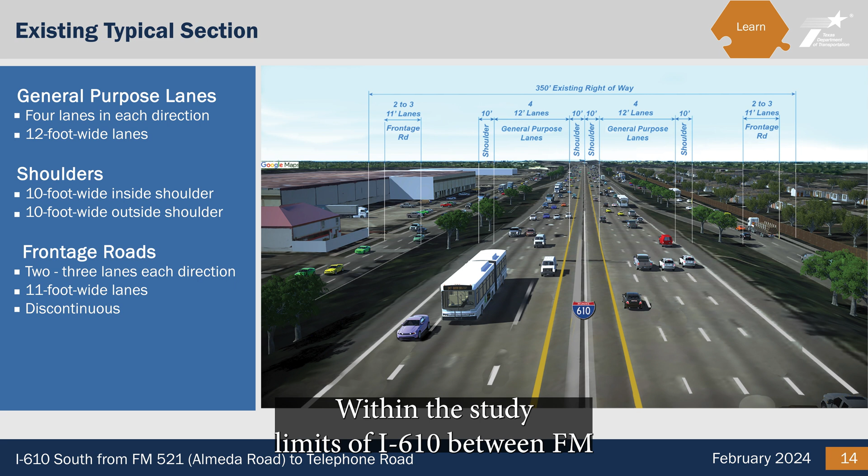Within the study limits of I-610 between FM 521 Almeda Road and Telephone Road, the current roadway has 4 12-foot general purpose lanes in each direction with 10-foot wide shoulders.

The frontage roads have 2 to 3 11-foot wide lanes and are discontinuous in some areas. The existing right-of-way is typically 350 feet.

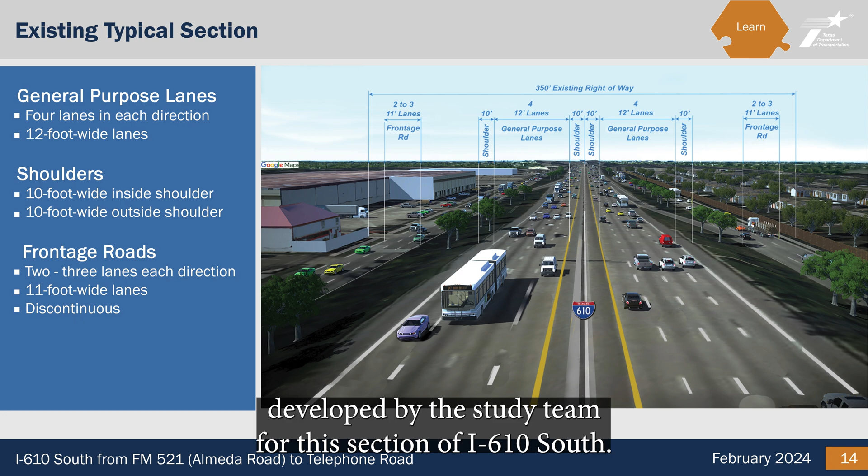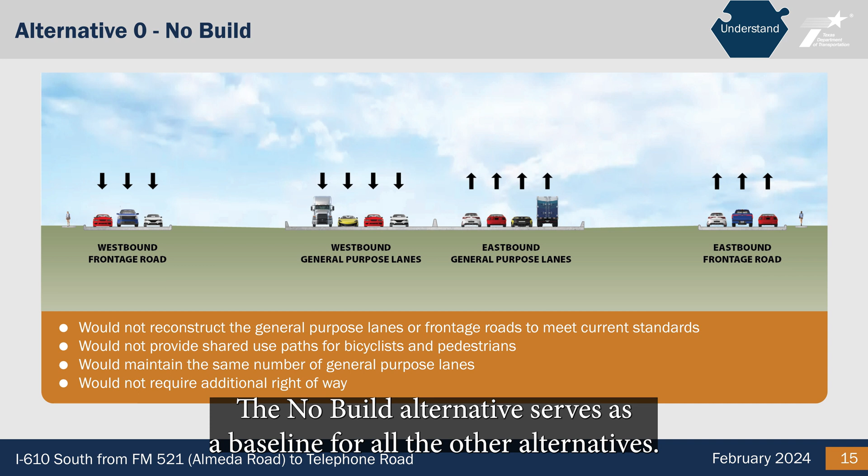The next slides show the conceptual alternatives developed by the study team for this section of I-610 South. The first conceptual alternative is Alternative 0, referred to as the no-build alternative, which means do nothing. The no-build alternative serves as a baseline for all the other alternatives.

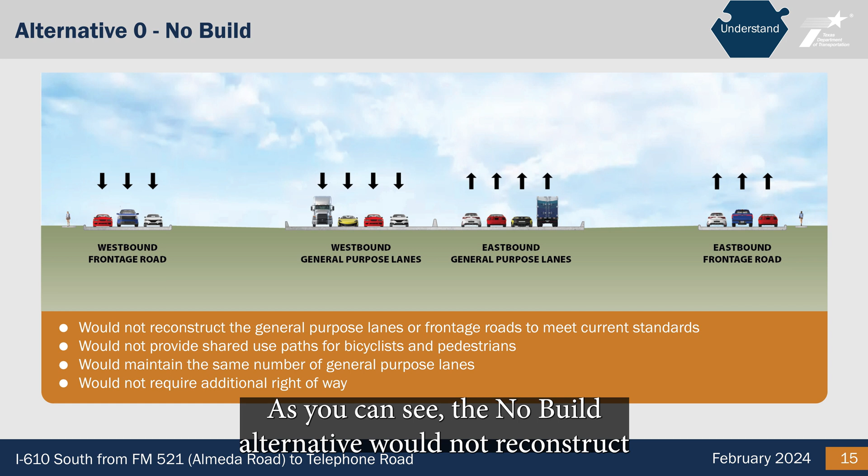This portion of I-610 South would not change and would be the same as it is today. As you can see, the no-build alternative would not reconstruct the general purpose lanes or frontage roads to meet current standards.

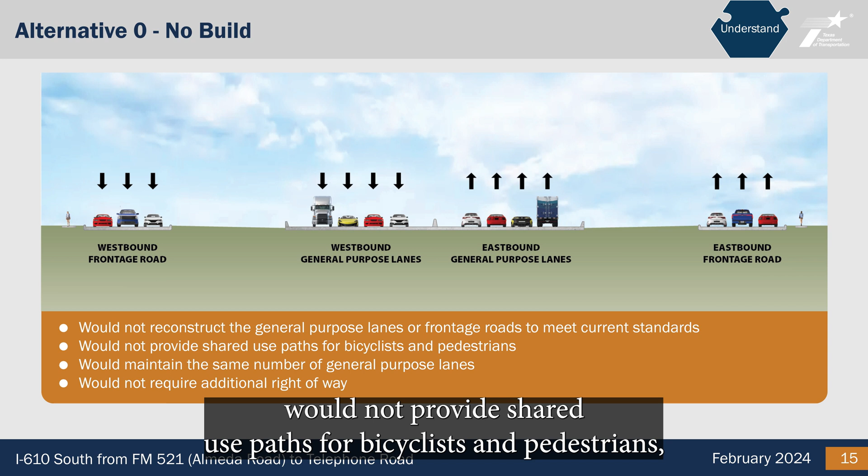It would not provide shared use paths for bicyclists and pedestrians, would maintain the same number of general purpose lanes, 4 in each direction, and would not require additional right-of-way.

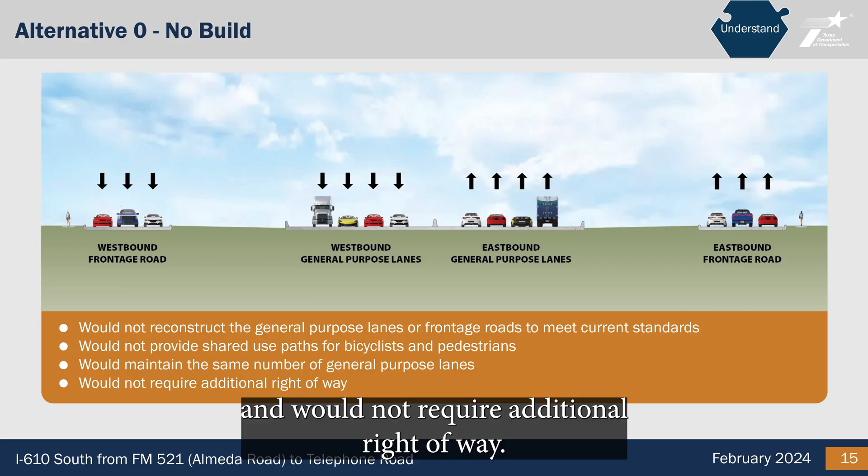The next alternative is Conceptual Alternative 1, Operational Improvements. These improvements would reconstruct the general purpose lanes and frontage roads to meet current standards, provide shared use paths for bicyclists and pedestrians.

It would maintain the same number of general purpose lanes, 4 in each direction, fix localized problem areas at ramps and intersections and along the frontage roads, and would require approximately 20 to 45 feet of additional right-of-way in some areas.

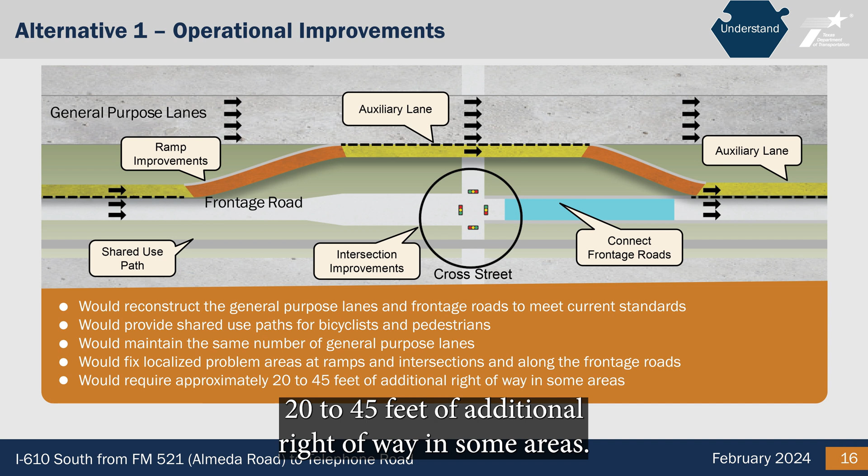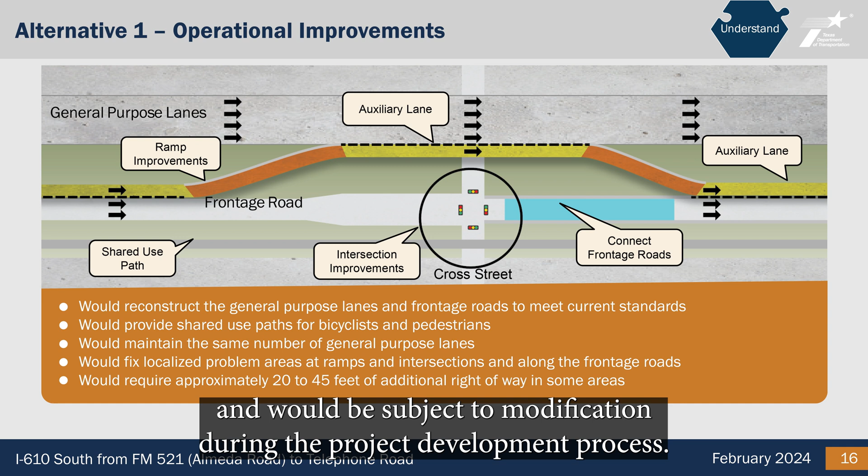Keep in mind that any alternative recommended at the conclusion of this feasibility study may become future projects and would be subject to modification during the project development process. At that time, specific right-of-way needs would be identified and presented at future public meetings.

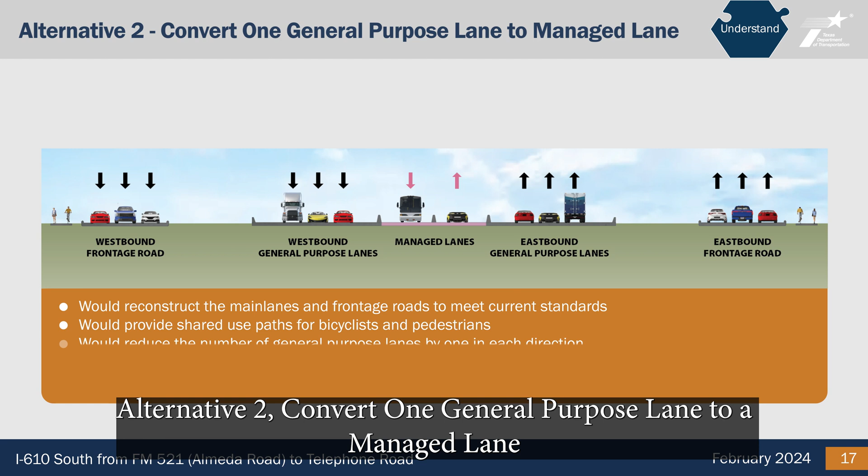Alternative 2, convert one general purpose lane to a managed lane, shown here, would reconstruct the main lanes and frontage roads to meet current standards, provide shared use paths for bicyclists and pedestrians, and reduce the number of general purpose lanes by one in each direction.

It would add one managed lane in each direction at the same level as the general purpose lanes, and would typically require approximately 25 feet of additional right-of-way and 45 feet in some areas.

Managed lanes are a set of lanes within the freeway that are separated from the general purpose lanes. They help improve safety, reduce congestion, and provide options for multimodal opportunities and connectivity.

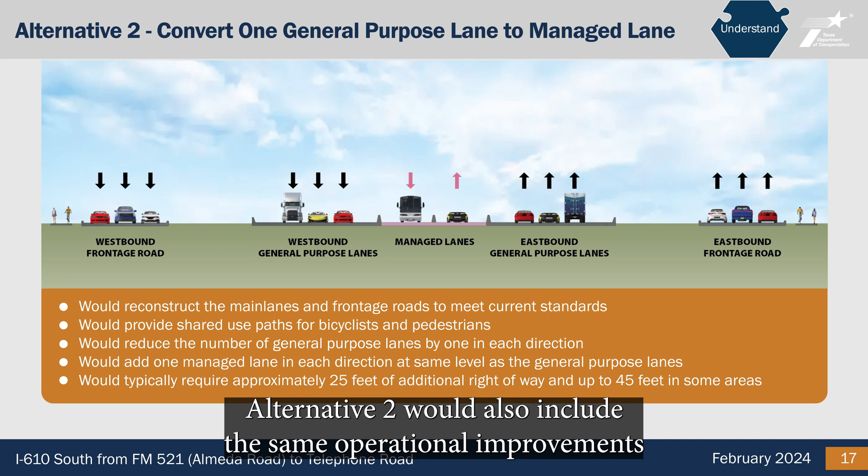The use of managed lanes is determined by factors like the type of vehicles, what time of day it is, and access points. Alternative 2 would also include the same operational improvements as described in Alternative 1.

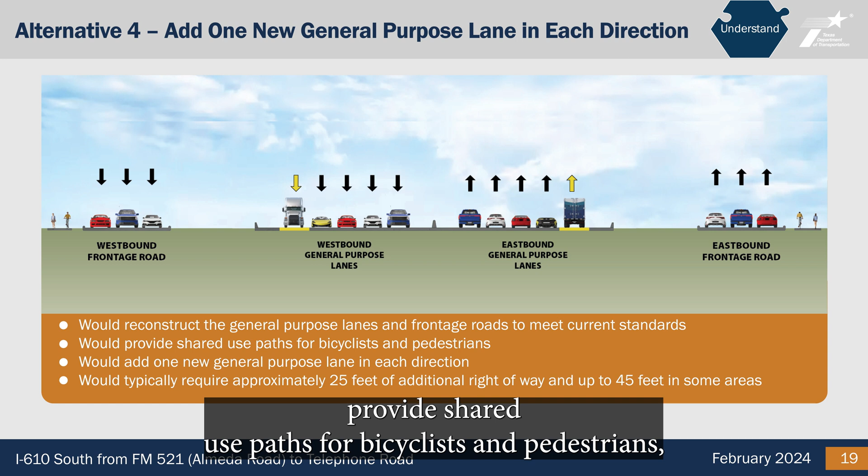The last alternative, Alternative 4, add 1 new general purpose lane in each direction, would reconstruct the general purpose lanes and frontage roads to meet current standards, and provide shared use paths for bicyclists and pedestrians.

It would add 1 general purpose lane in each direction, and would typically require approximately 25 feet of additional right-of-way and up to 45 feet in some areas. Alternative 4 would also include the same operational improvements as described in Alternative 1.

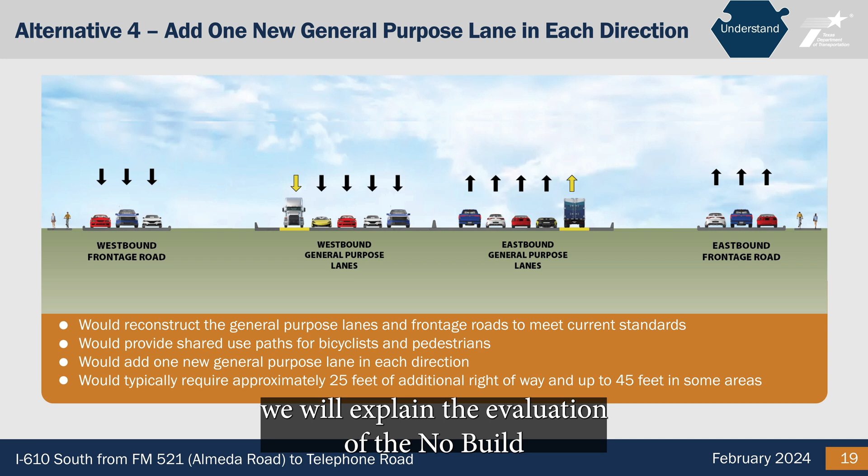Next, we will explain the evaluation of the no-build and the 4 build conceptual alternatives that we just reviewed. The study team screened each alternative to determine how well it addressed the needs and goals identified for this section of I-610 South.

As shown on the slide, the conceptual alternatives were rated based on how well they performed against the established needs and goals.

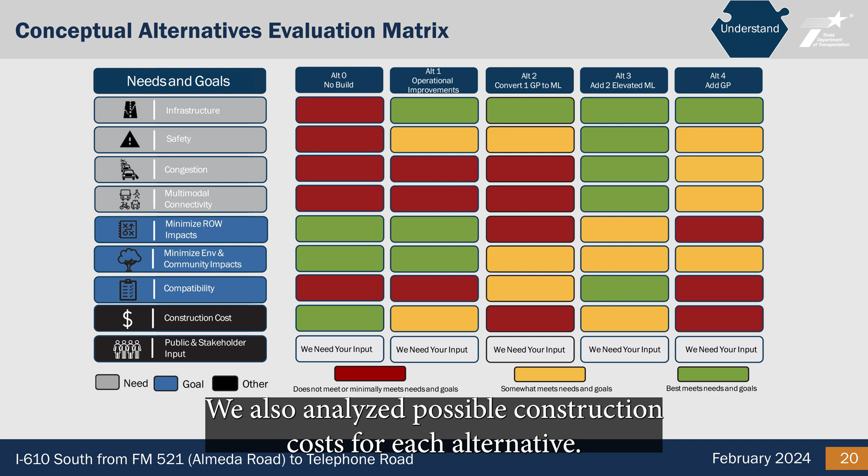We also analyzed possible construction costs for each alternative. The rating scale used was does not meet or minimally meets needs and goals, indicated by the color red, somewhat meets needs and goals, indicated by the color yellow.

And best meets needs and goals, indicated by the color green.

Overall, Alternative 3, add 2 elevated managed lanes, rated the highest, and Alternative 0, no build, rated the lowest in meeting the needs and goals.

The public and stakeholder input category will be completed and factored into the overall alternatives evaluation matrix once public and stakeholder input is received from public meeting number 2.

This will assist the study team in identifying the viable alternatives. During the viable alternatives evaluation, the study team will perform a more detailed analysis of needs and goals, including the goal to minimize environmental and community impacts.

TxDOT is committed to identifying and evaluating potential environmental impacts that could occur as a result of any projects resulting from this feasibility study. During the project development process, potential environmental impacts will be considered as alternatives are developed. Once a project is proposed, an analysis of the existing environment and potential impacts will be conducted. Areas that would be analyzed and documented include biological resources, community impacts, environmental justice, water resources, hazardous materials, archaeological resources, historic resources, and traffic noise.